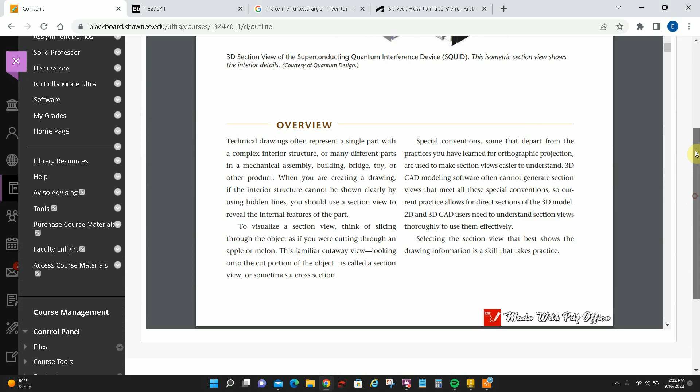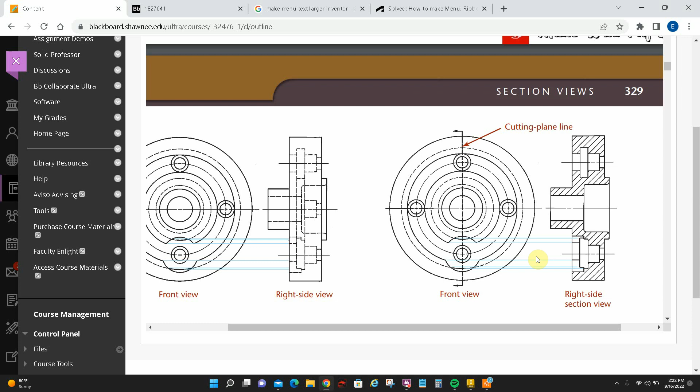So it's just one object. Let's take a look at the object. It's basically kind of a hat-shaped flange or something. There's various ways to do this, but we're going to start with the most simple way, and it's just a couple extrusions. We're going to start with the base of it.

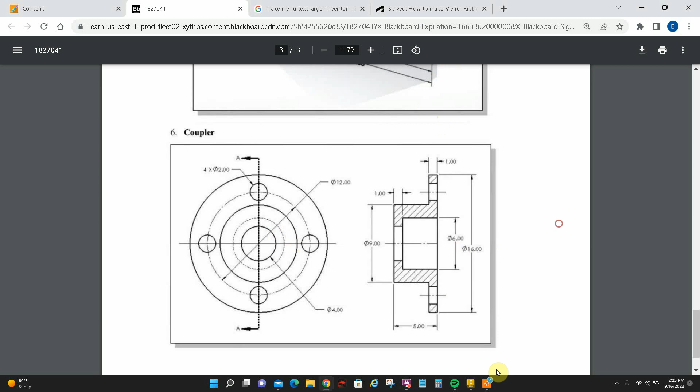We got a circle and a bunch of holes. Let me get to our drawing, create. I'm going to start this sketch on this plane down here, the XZ plane, because as if it were sitting on the ground, right? I'm going to put a circle here, and it's got a diameter over here.

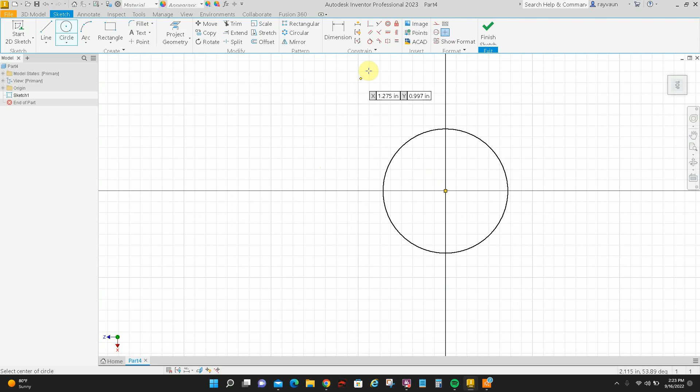We get the dimension, the diameter is 16. Excuse me, I'm not going to do the interior hole, I'll do that later.

But we can do these 4 holes here. There's 4 of them, diameter 2, and they're on a diameter 12 bolt circle. This is called a bolt circle, where you would have holes like on a wheel, where you put your lug nuts. It's diameter 12, and they're equally spaced around.

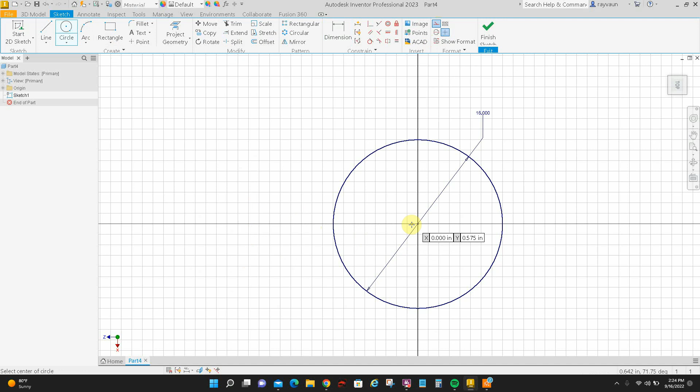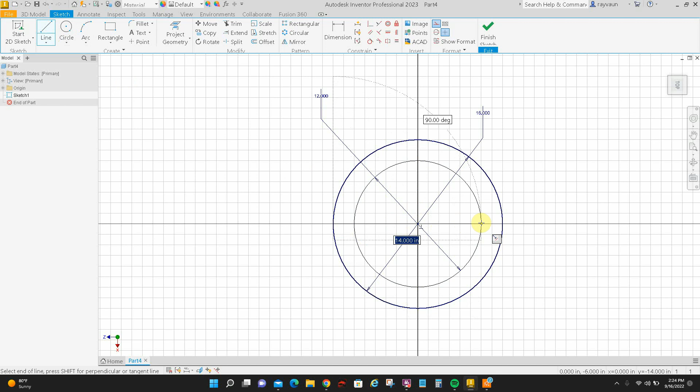So I'm going to get construction lines, turn on my construction line right here. I'm going to do a circle from the center and put in a diameter of 12. Then I'm going to get a couple lines and establish my 4 lines from top to bottom. So if I mouse over that green, I come back here and look for that little yellow, it'll give me that quadrant. Okay, so now I have intersections where I can place these holes.

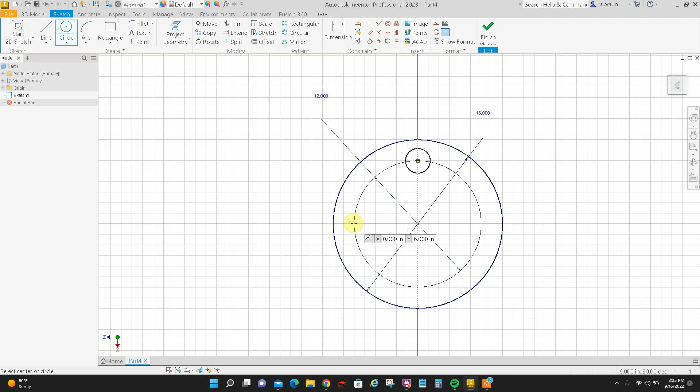So now I'll turn off my construction layer. Then I can come in and pick on those intersections and put my 4 holes. Now I can do this using an array, I'll show you that, I kind of mouse over till I get that yellow dot, right? I could use an array, but this is just as well. I'm going to make them all equal, that equal to that, this equal to this, this equal to this. So I'll just put that dimension in once, which is a diameter of 2.

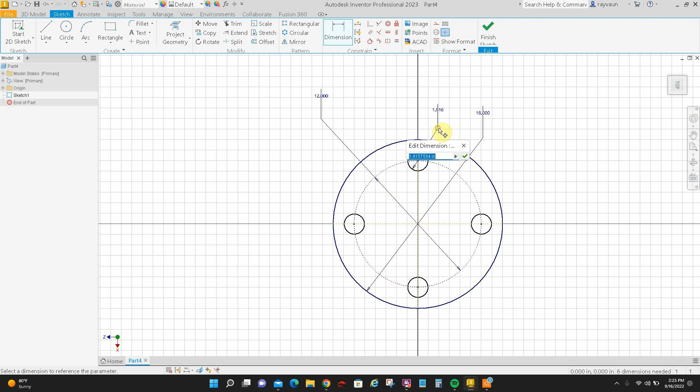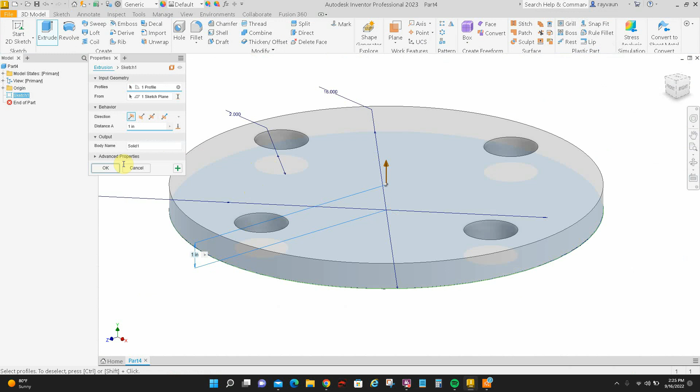And that's all I'm going to do for this part, and it's 1 inch thick. So this is my first extrusion. I'll say finish sketch, extrude, pick my profile. 1 inch is already in here, so I'll just have to say OK.

Now I need to do the top of it. The top part, so that is a 9 inch circle with a 4 inch hole in it. We can't really deal with the hole because there's already a hole down here - wait, there's no hole down here, we'll do that later. So we'll just do the circle.

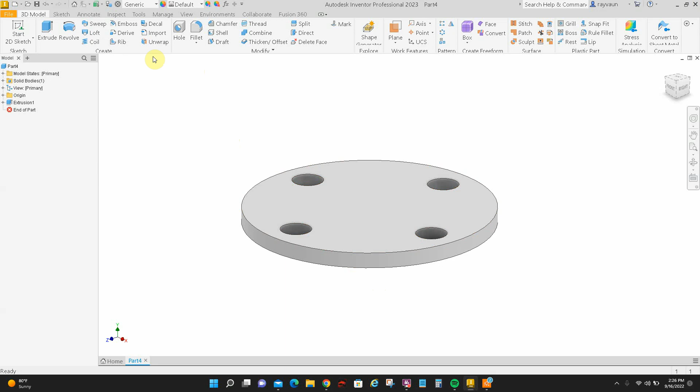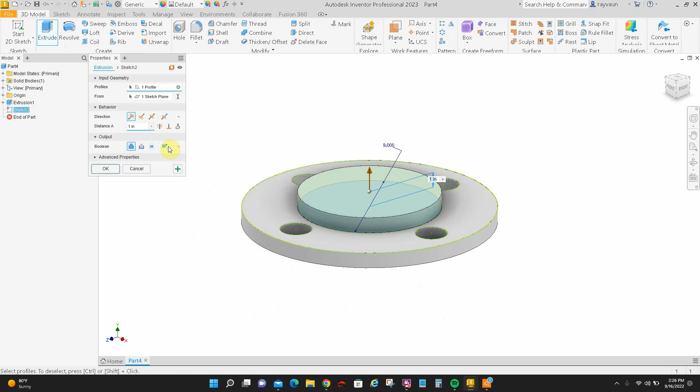I'm going to do a sketch plane right here, draw a circle on top of it, make sure it's concentric on the center point, place 9 inches. Finish the sketch, I'm going to extrude this up. The whole thing is 5, but we already got 1 inch here, so we're going to do a 4 inch extrusion from this plane. So we'll do extrude 4 inches.

Now I have basically a counter bore. I can use a counter bore command, but I'm just going to use simple cuts right now since we're really early in the game here. We've got a hole in the center that's 4 inches, and the counter bore diameter is 6. So we'll do the 4-inch first.

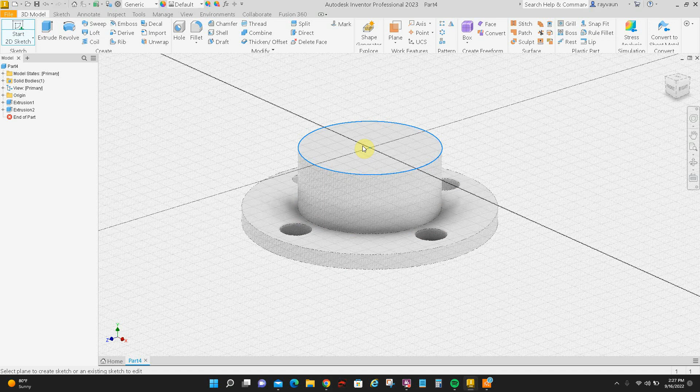So we'll put a sketch plane here, do a circle from center, 4 inches, enter, finish the sketch, and I'm going to extrude cut that hole, do a cut. I'm going through all. Let's say okay, so now I've got the smaller hole cut through.

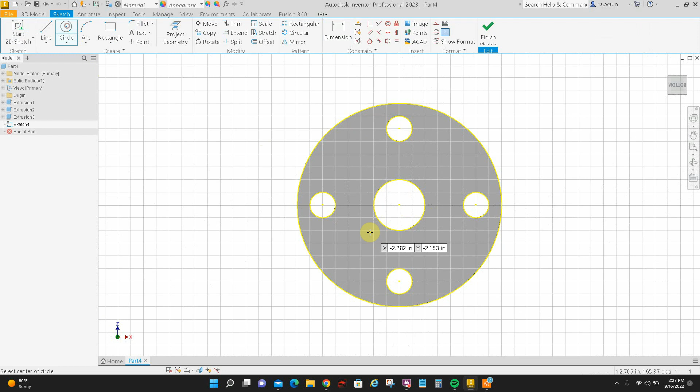Now I need to put the counter bore. So I'm going to place a sketch plane on the back surface. I'll do another circle right here. This is going to have a 6-inch diameter. Okay, all right, 6, yes.

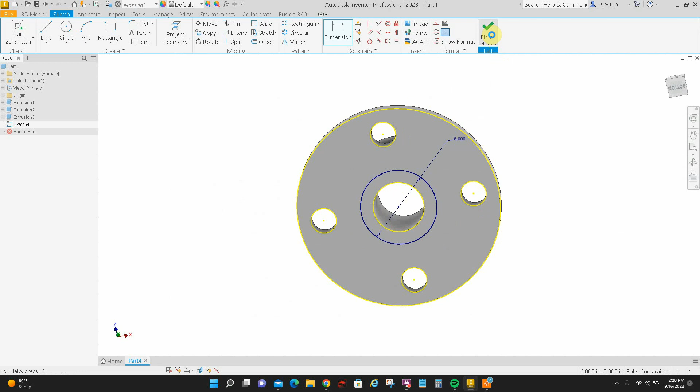And it has a depth of - if this is completely 5 inches tall from the base and there's 1 inch thickness here, I'm only going to come down here 4 inches. So when I do my cut, I'll say finish the sketch and extrude this right here, cut, and I'm going to change this to 4 inches. Distance is now 4 inches. And I say okay, and there I have that object.

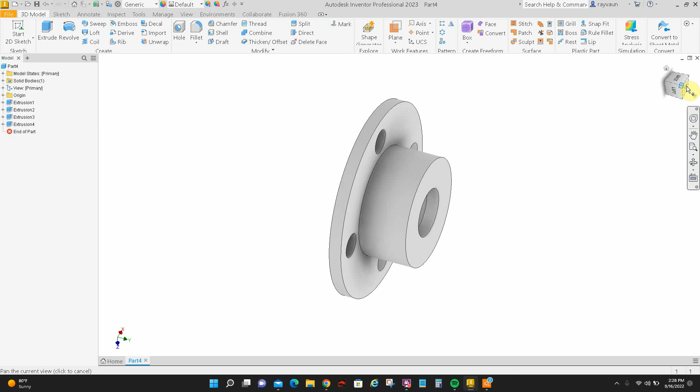So just to kind of clarify things a little bit, let me say this. It's called the coupler, right? And this is what you would turn in, but in the future we'll be turning in drawing sheets.

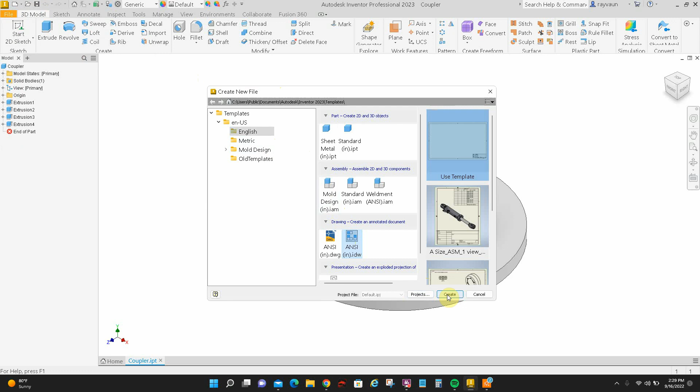So if I were to make a drawing sheet out of this, so you can click - no, where's that at? File, new, drawing, create. So if I were to make a drawing out of this, okay.

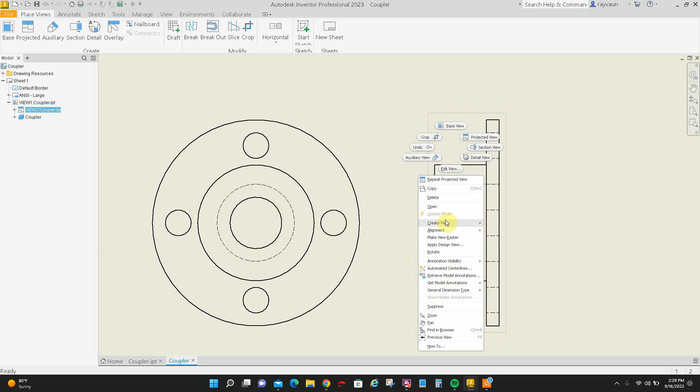This would be the front view, and that would be a side view. But if you look at this object, it doesn't look like that. It's a section view, so here we have the hidden lines and everything. So we'll get rid of this view, delete, and we'll put a section view in here.

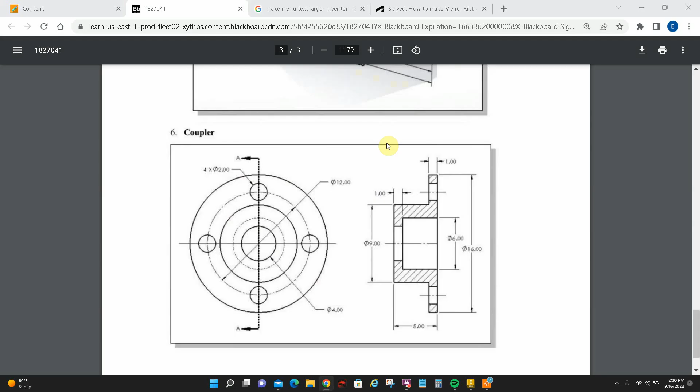You see where that's coming from? The hidden lines. Now we don't have center lines and stuff in because I haven't added those yet, but that's the basic of what you're looking at here to come up with your end result, which would be that, which we have right here. But this, don't worry about this yet, this stuff comes later. This is all I want you to hand in right here.